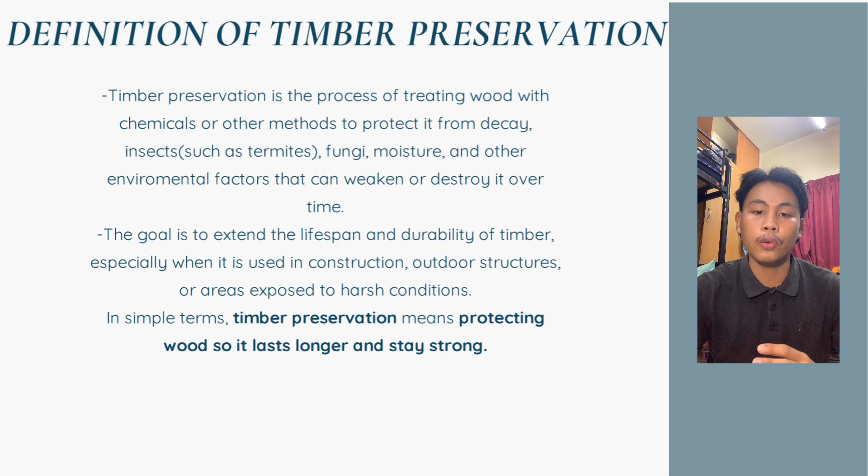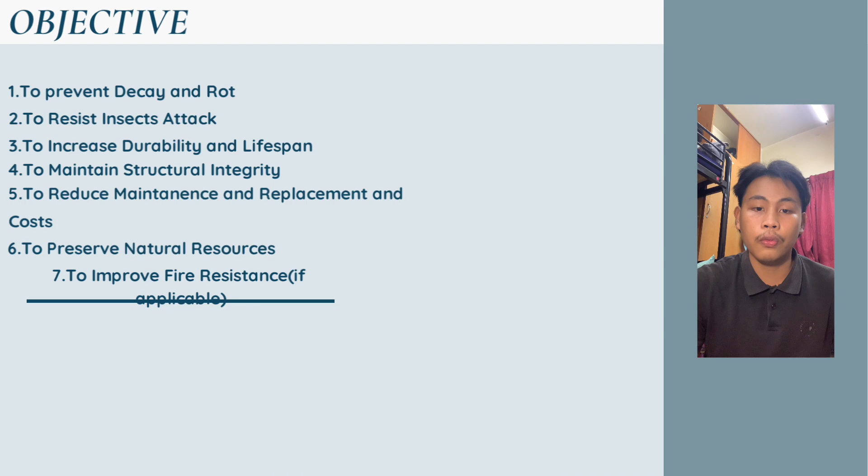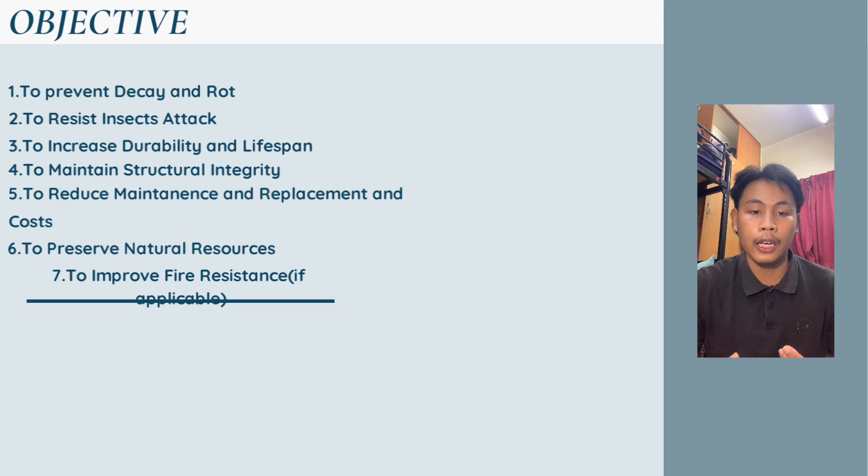Third, it increases the durability and lifespan of the wood, making it suitable for long-term use. Fourth, it helps maintain the structural strength of timber in buildings and outdoor structures. Timber preservation also helps to reduce maintenance and replacement costs, which saves time and money. Additionally, it helps to preserve natural resources by reducing the need for fresh timber. And in some cases, it can improve fire resistance depending on the treatment used. Overall, these objectives make timber safer, stronger, and more sustainable for various uses.

Hello everyone. Today I will be presenting a brief but informative overview of the different types of timber preservatives, focusing on their functions, compositions, and applications in protecting timber from deterioration. Timber, although a natural and versatile material, is prone to decay, insect attack, and fungal growth. That's why applying preservatives is essential, especially outdoors in humid conditions.

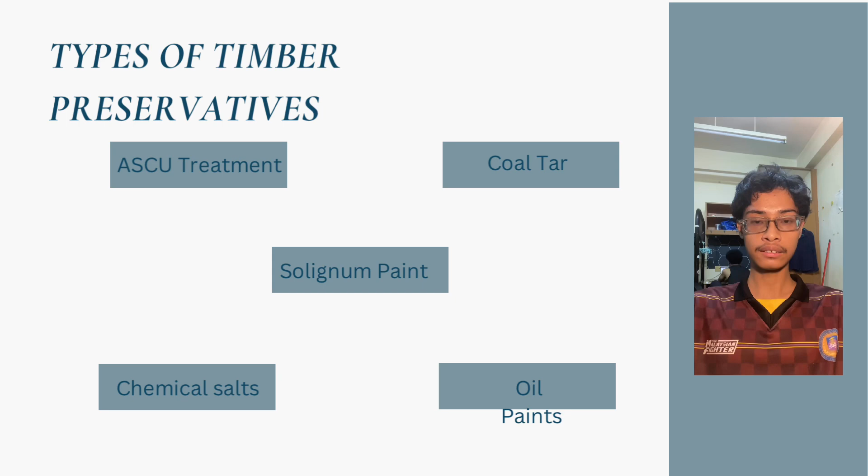Now, I will explain 5 types of timber preservative. They are ASCU treatment, coal tar, Solignum paint, chemical salt, and lastly, oil paints. Now, I will explain the first type of timber preservation, which is ASCU treatment. ASCU treatment is one method to protect timber from insect and fungal damage. The term ASCU stands for A, Arsenic; S, Salt; C, Copper; and lastly U, Chromium. Each of these elements plays a key role in enhancing timber resistance.

Arsenic acts as a powerful insecticide. Copper protects against fungi. Chromium improves fixation of the chemical in the wood. And lastly, salt acts as a carrier. ASCU treatment is commonly applied through pressure treatment of the wood, which is effective for structural timbers used outdoors.

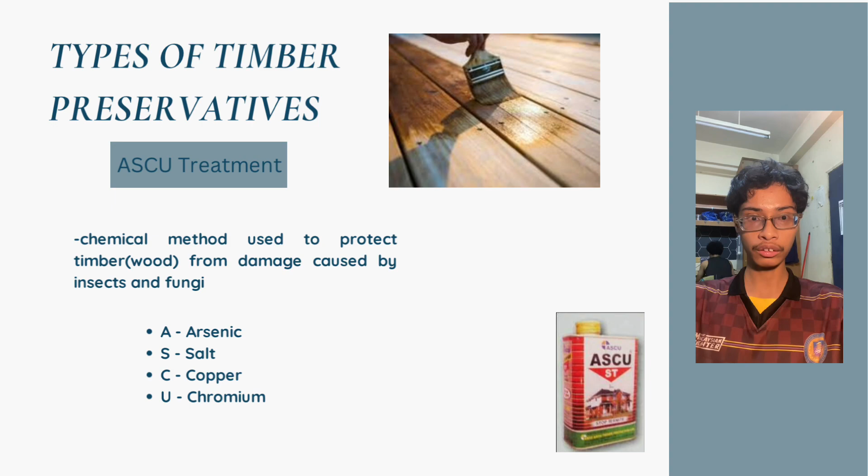Next we have coal tar. Coal tar is a thick, dark and sticky liquid which is obtained as a byproduct during the destructive distillation of coal.

It is widely used as a protective coating, especially for underground or underwater timber structures because of its high water resistance and durability. Once applied, it creates a strong barrier that shields timber from moisture, insects, and other forms of decay. However, due to its strong odor and toxicity, its use is now more regulated and has decreased in favor of more eco-friendly options.

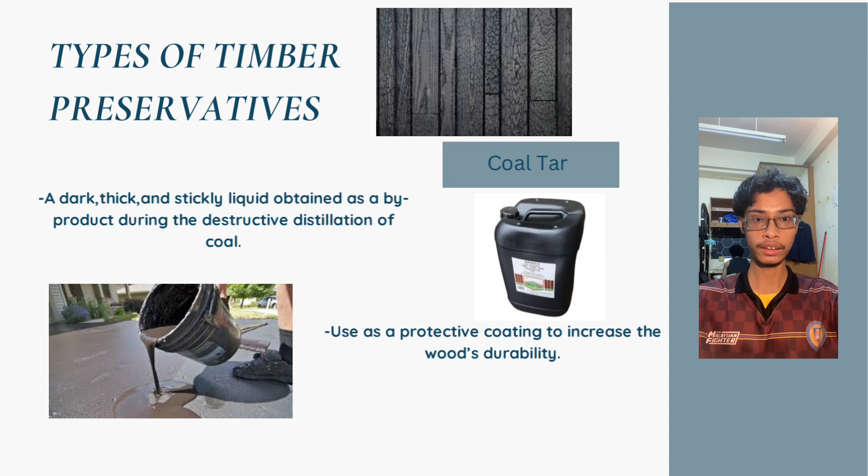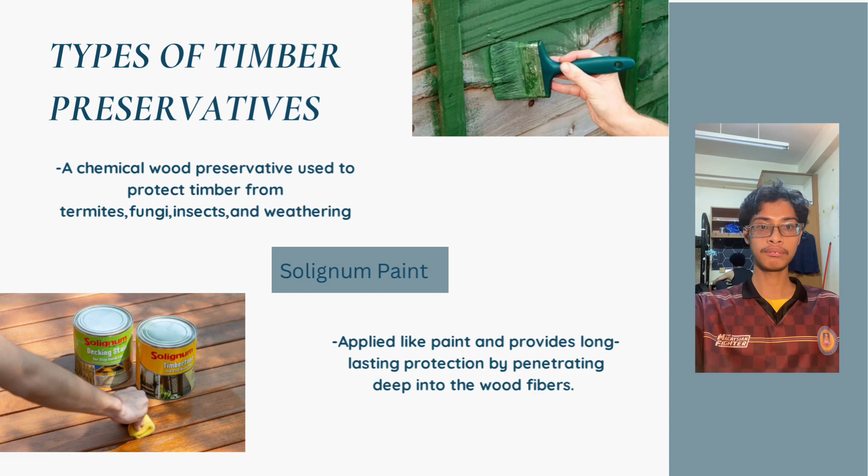Now, let's talk about Solignum paint. Solignum is a branded wood preservative paint that protects timber from termites, fungal growth, and weathering. It is commonly applied with a brush or spray and penetrates deeply into the wood fiber. It not only provides chemical protection but also adds a decorative finish. This makes it ideal in both indoor and outdoor use, and exposed beams. Ease of application and aesthetic value are key advantages of using Solignum-based preservative.

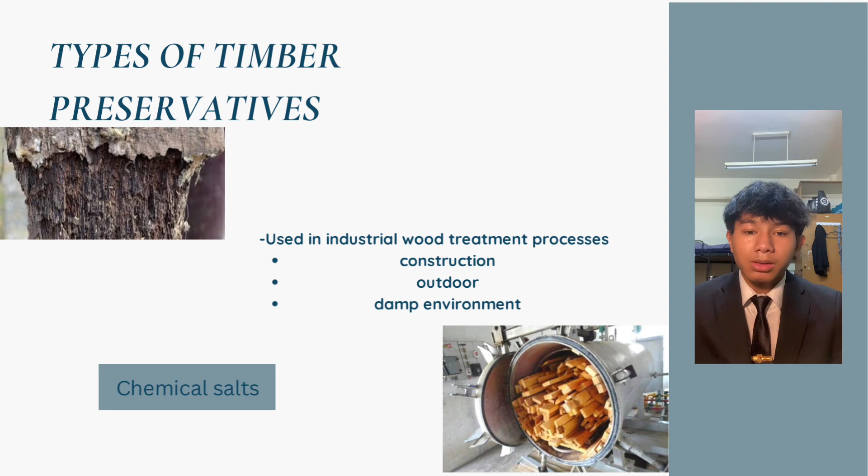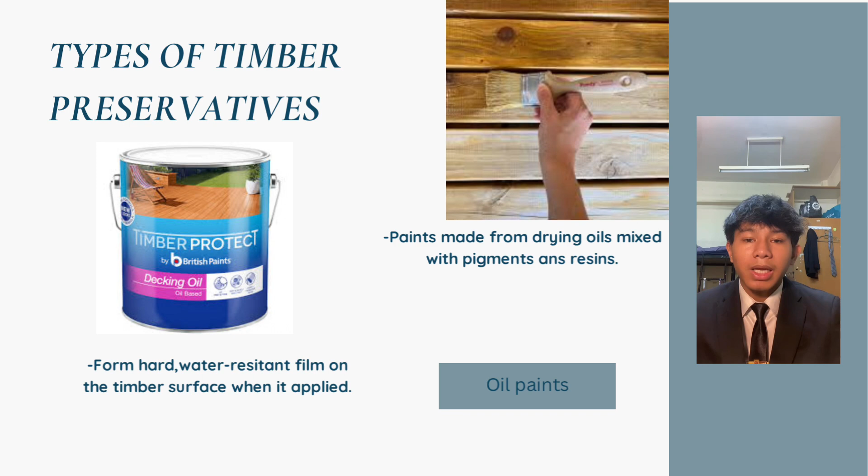This type of treatment is ideal for aesthetic applications. For example, for visible timber structures like wooden furniture, window frames, or decking boards. It not only protects the wood but also enhances its appearance. However, unlike chemical salts, oil paints typically do not penetrate deeply into the wood, so their protection is mainly surface level and may need to be reapplied periodically.

In conclusion, timber preservation is a vital process in construction and design. Without proper treatment, timber is prone to rot, decay, and insect attack, especially in outdoor or humid environments. The use of preservatives like chemical salts and oil paints helps ensure that timber products last longer, perform better, and stay structurally sound. Chemical salts offer deep and long-lasting protection, ideal for heavy-duty applications, while oil paints provide surface protection and a decorative finish. Choosing the right preservative depends on the environment, function, and expected lifespan of the timber being used.

Additionally, preserving timber correctly not only saves money and reduces waste, but also supports sustainable building practices by minimizing the need for frequent timber replacement. As future professionals in the industry, understanding these methods helps us make smarter and more responsible material choices.

Alright, thank you for your attention. I hope this presentation has helped you understand the importance of timber preservatives and how different types serve specific functions.